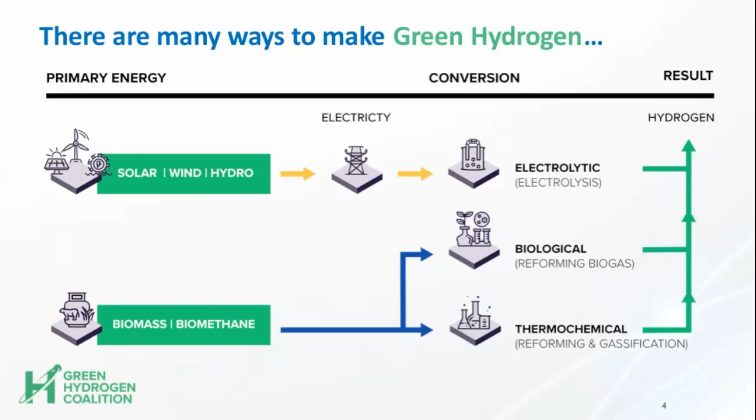Before I go full steam ahead with why green hydrogen is so important, I want to make sure we're all on the same page with regard to what green hydrogen is. For the Green Hydrogen Coalition, we basically define green hydrogen as any hydrogen made from a renewable energy resource. We support all of the above on applications and pathways for making green hydrogen, whether using renewable energy to power electrolyzers that split water into hydrogen and oxygen, electrolytic hydrogen production, biological production through reforming biogas, or thermochemical applications. Essentially, any process that utilizes renewable energy to produce green hydrogen with no carbon emissions is what we consider to be a critical pathway to a decarbonized energy future for everyone.

We really think green hydrogen is a super game changer. To put this in perspective, many of the things we enjoy today—our economy, industry, agricultural sector, power sector—have been fueled by low-cost fossil resources. That is changing, and changing rapidly, because there is demand today for a lower carbon energy future.

That's why green hydrogen can be very important as we look at this low carbon energy and industry future. It is commercially viable. It can repurpose infrastructure and provide for jobs. Hydrogen is already traded today, so it can decarbonize a globally traded commodity. It's utilized in many sectors, so we can decarbonize many sectors. Specific to the power sector, as we see more renewable energy integrated into the system, green hydrogen can provide a solution for reliability and resilience. We really view green hydrogen as a super game changer because of its versatility and because it can be commercially developed and deployed across multiple applications: transport, power, industry, chemical, agriculture—and I think we'll find unlimited applications for green hydrogen going forward.

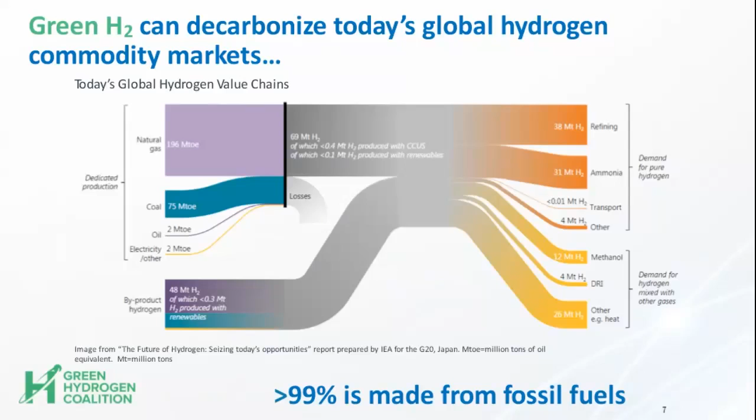To further emphasize this point, hydrogen is used today—it's about a 70 million metric ton traded volume annually, used in many, many sectors. The challenge is that 99% of the hydrogen we use today is made from fossil fuels, either natural gas or coal. A very small percentage is made from renewable energy resources, or green hydrogen as we've defined it previously.

So we think there are drivers for green hydrogen today. As we look at the transportation sector, I'm sure you've heard about initiatives for electric vehicles or zero emission vehicles. Looking at those transportation uses and decarbonized solutions in the transport sector—which can be very difficult to decarbonize, particularly maritime, trains, or large fleets—green hydrogen can certainly be a resource across that sector.

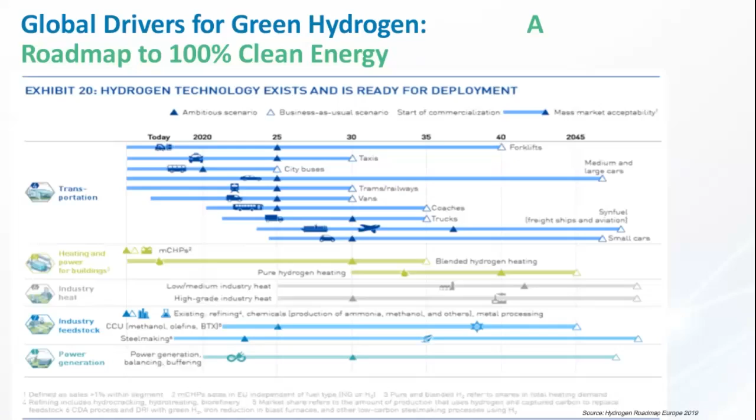We also talked briefly about the industrial sector and chemical applications. What we're seeing today within those applications, occurring globally, is a social license to operate, and pressures to decarbonize across those sectors. So they're looking at green hydrogen as a solution, providing a clean energy and feedstock roadmap for the future. It's not to say there aren't barriers—if you've heard about green hydrogen, you've probably heard some of the considerations around barriers to accelerating green hydrogen production and use.

But just take a look at what's happening across the globe today. Renewable resources, solar and wind, are becoming super cheap, and in fact they are displacing other forms of power generation, in particular gas peakers or combined cycle gas turbines. This trend is continuing as the cost of these renewable resources keeps declining, even faster than people expected. So you've probably heard that cost can be a barrier to deploying green hydrogen, but to the extent these resources are used in producing green hydrogen, the decrease in the cost of these inputs will be significant in reducing the cost of green hydrogen and making it a viable resource.

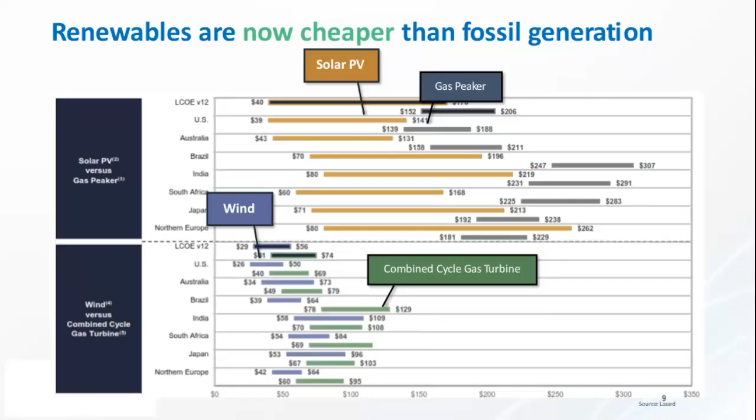In fact, most analytics are predicting that green hydrogen really is commercially viable and is on a trajectory to be the lowest cost. Today, I think probably a conservative estimate has been provided by IRENA, the International Renewable Energy Agency. As a government agency it does tend to be conservative, and it projects that the cost of green hydrogen will be halved by 2050. We think it can happen much faster than that, and there are other predictors out there that indicate that.

Why is that the case? Well, because as we see these demand drivers, we see the cost of renewable energy coming down, and we begin to see the scale up and deployment of green hydrogen, effectively we're going to see cost reductions. So let's jump into some of the demand drivers.

Relevant to the conversation today, renewable energy is an important part of a low carbon energy future. Our economy has relied on fossil energy to provide this reliable baseload energy resource, different from the renewable energies we're seeing coming into the market today. I don't know if everyone is familiar with what's happening in California, but essentially at times of the day there, so much renewable energy is produced, predominantly from solar resources, that they actually have to curtail those resources. Now, curtailing resources isn't necessarily a bad thing, but it's really when you get these uneconomic curtailments and very steep ramp rates.

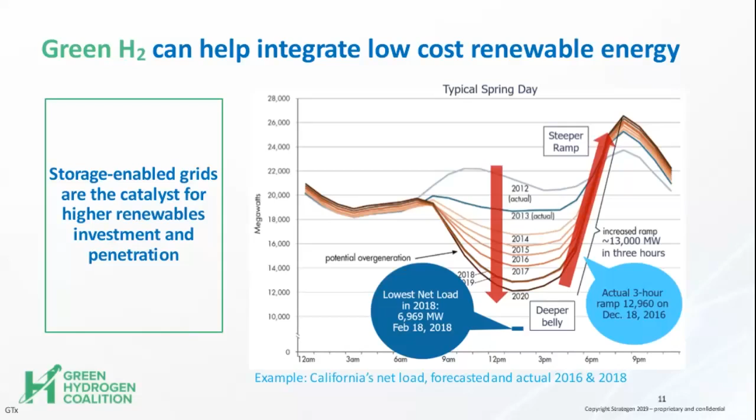The reason for that is a lot of this low-cost renewable energy does get used across the Western grid. So it can be an important resource, but we really have to address the significant ramp rate, and storage is a very important part of that. It's not just short-term battery storage, it's going to be long-duration energy storage that's required to provide for longer duration shifts and seasonal shifts on the grid.

So I want to highlight that to really look at long-duration energy storage and push this into the system, and green hydrogen specifically, we really need leadership, and leadership is going to be fundamental to seeing this happen. A big place where that is going to occur is on the regulatory landscape, because storage and green hydrogen provide just a suite of values, and that value proposition is significant.

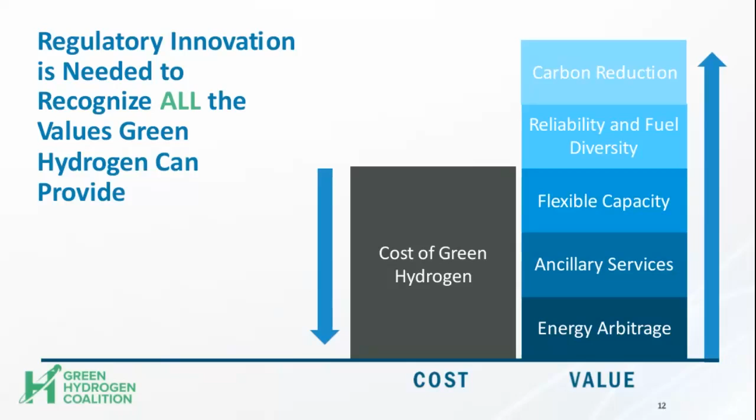So if we can bring down the cost of green hydrogen, extend the utilization of green hydrogen for storage, and account for all of these additional benefits, I think that's going to address some of the hurdles in seeing broader deployment. So with that, I want to turn to what's happening today, because this isn't just creative ideation. This is happening in the real world today.

Across the globe, we're seeing ports in Belgium looking to utilize green hydrogen by 2025. We're seeing production in Canada coming online in the next couple of years to inject green hydrogen into a gas pipeline. So we're seeing this move to utilize existing infrastructure, repurpose it to provide for a low carbon energy future. And that's happening right here in the West, in Utah specifically, with the reimagining of the Intermountain Power Plant, repurposing that existing infrastructure to support the demand for energy and power in California.

So through leadership, which is really critical to driving this future, we have through IPA and LADWP the emergence of a very significant and important project. The Green Hydrogen Coalition is very focused on this project and breaking down policy and regulatory barriers to assure that this project is wildly successful, we'll say. So we're super grateful, of course, for all of the leadership to launch this project.

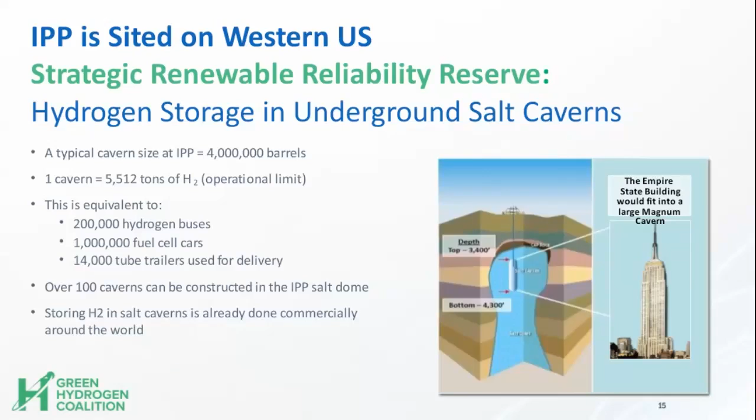In addition, we think that this can drive feedstock availability for many other sectors, including the transportation sector - buses, cars, and other aspects of transportation - and really can be a game changer in realizing a decarbonized energy future for everyone.

So today, green hydrogen is in fact the only commercially viable seasonal storage solution. We support all types of storage, and I personally think all types of storage are going to be needed. Estimates indicate that in the western United States, we're going to be capacity short in the very near future.

Some predictions estimate as early as the next 5 years, we're going to be in a situation where we've really got to add a lot more storage to the system. But just generally speaking, by about 2032, we're going to need close to 50 gigawatts of energy storage on the system.

A small portion of this will be needed from short duration energy storage like batteries, possibly compressed air energy storage, and also pumped hydro. But when we really look at the seasonal energy storage and shifts, we're going to need a significant amount of diversified large-scale energy storage.

So we think that this is absolutely possible. And as you look at the levelized cost of hydrogen storage, storage in salt caverns is going to be the lowest cost.

But I do think it's important to note that hydrogen can be stored in other ways as well, in rock caverns, in ammonia through thermochemical processes, and also in depleted gas fields.

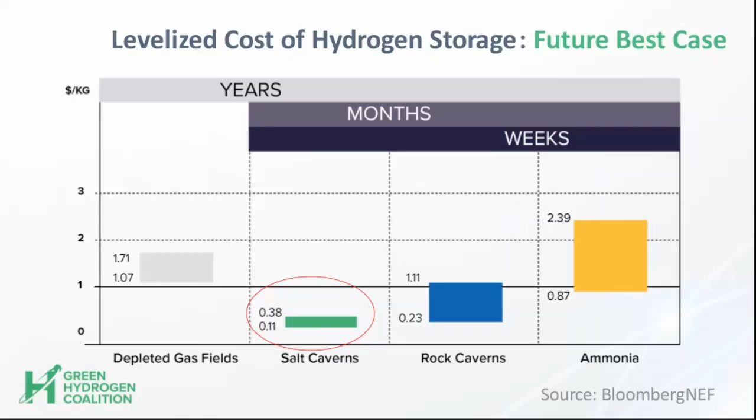So we're on the trajectory for this future. We're very excited about it. Green hydrogen is going to be critical to solving our grid challenges and meeting the energy storage requirements of the future. So that's it.

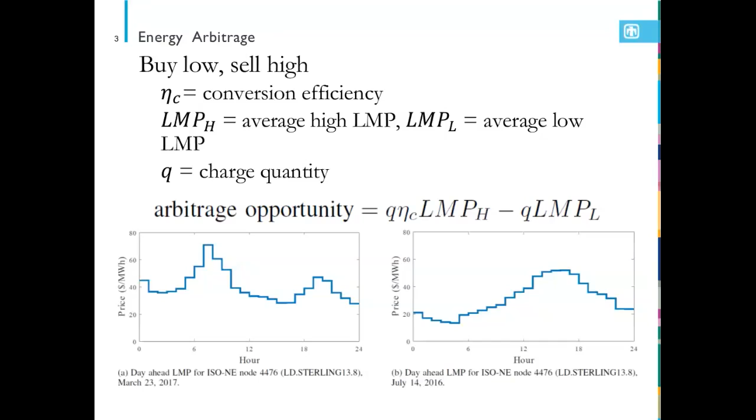Also, because energy storage arbitrage is only maybe done for a couple hours a day - let's say you're just taking advantage of one peak in the late afternoon - a typical system might charge for 5 hours and then discharge for 4 hours. You're really only using it about 9 hours a day, so the utilization isn't very high. That helps explain why the revenue is often not very high.

But as far as efficiency, if you have 85% round trip efficiency, you have to have about 118% price difference just to break even. If you have 65% round trip efficiency, you have to have 153% price difference just to break even. So once your efficiency starts getting lower, you really need big price changes in order to just break even, let alone make money.

In market areas, it's pretty well defined - you have market prices. In vertically integrated utilities, you can still do arbitrage, but really what you're doing is lowering the overall operating cost of your whole system. If you can better dispatch your traditional generation, you can have cost savings on fuel and other things. So it's really a savings in a vertically integrated utility, whereas in a market area, you're buying and selling, trying to make a net profit.

There are also different variants. You can charge with inexpensive renewable energy. You can also participate in maybe the day-ahead and real-time markets, or just participate in the day-ahead only market.

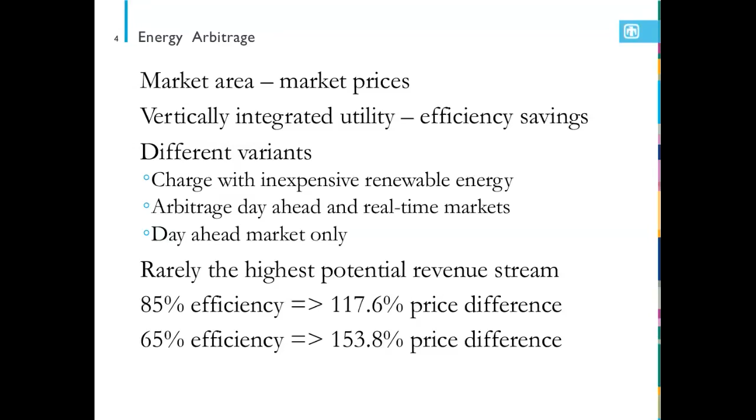So this slide just shows some sample results for California. We used our software tools to model a 1 megawatt, 4-hour system with 80% round trip efficiency and looked at 3-year total revenue by LMP node using 2014, 2015, and 2016 data.

We actually completed a similar study this year going from 2014 to 2018. The color of the dot is proportional to the amount of total revenue over that 3-year period. For this analysis, we assume perfect foresight, meaning you know the future, which is the best you can possibly do. Without perfect foresight, you might get somewhere between 80 to 90% of this revenue for the day-ahead market. The plot on the left is day-ahead market arbitrage.

The first thing you'll notice is the total best node is around $150,000 for the 3-year period. A 1 megawatt, 4-hour system might cost $2 million to $3 million, so you're really not going to come anywhere close to breaking even with $150K in total revenue.

The plot on the right shows day-ahead and real-time arbitrage. The first thing you'll notice here is the potential revenue is significantly higher. That's because of the volatility in the real-time market.

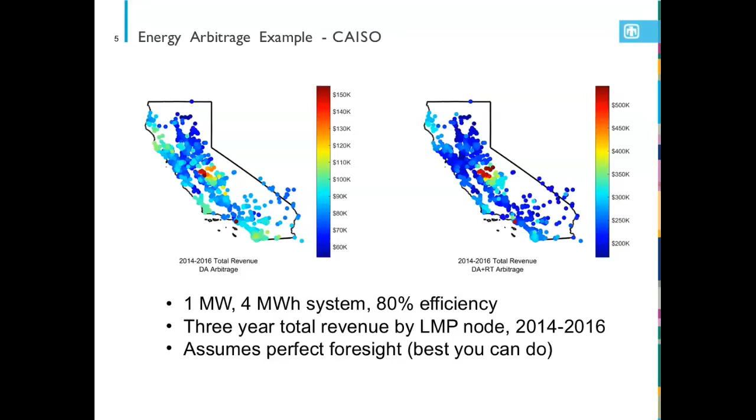Renewable energy time shift is another energy storage application. Dr. Nelson had previously discussed the California duck curve, so this will be the second mention - we'll see if Patrick mentions it in his presentation too. But the general idea here is that the deployment of large amounts of rooftop solar has really depressed demand in the middle of the day.

Then in the afternoon, as the solar rolls off and load increases, you have this quick ramp of required net load that you have to meet with generation. That does cause a reliability concern because in the electric power grid, your load always has to match generation to maintain grid frequency. And if the deviations become too great, that can cause under-frequency or over-frequency events, which ultimately might lead to blackouts.

In CAISO, they've implemented a ramping product. In other areas, arbitrage is your only option. But the idea here is if you could move the renewable energy from the off-peak part of the day when it's generated to later in the afternoon, you'll be able to basically flatten the demand curve and make the operation of the overall power system more efficient and safe.

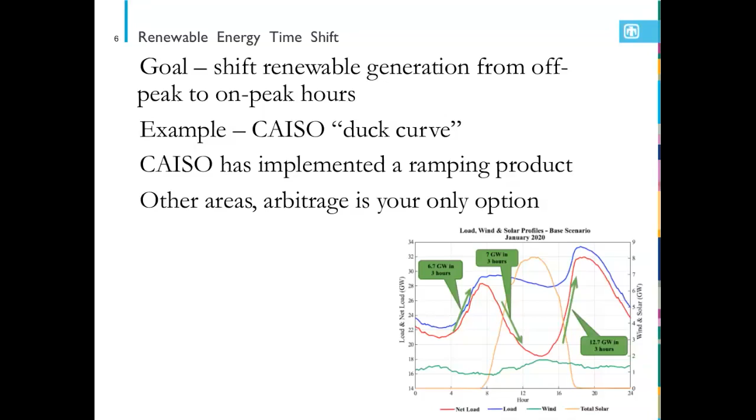One thing people often don't realize is there are trade-offs between the amount of storage, additional transmission - which provides geographic diversity and reduces variability - and renewable curtailment. So when you're looking at expanding a power system or modifying it to incorporate more renewable or carbon-free generation, you have these trade-offs.

Energy storage can easily store energy when it's not needed and then use it later when it is needed, and also help with the variability of renewable generation. Additional transmission helps reduce that variability, so it reduces the amount of storage required.

And as the previous speaker had also mentioned, you can curtail, which means you're basically not using the energy for anything. Although that sounds really bad, it's really an economic decision - what mix of energy storage, additional transmission, and curtailment will give you the lowest cost power system that meets your reliability requirements?

There's a misconception that lithium-ion batteries can be used for long-term storage. Maybe hypothetically they can be, but look at the Raccoon Mountain Pumped Hydro Facility in Tennessee. It's a 1.6 gigawatt system that can store for 22 hours, so it's a massive amount of energy.

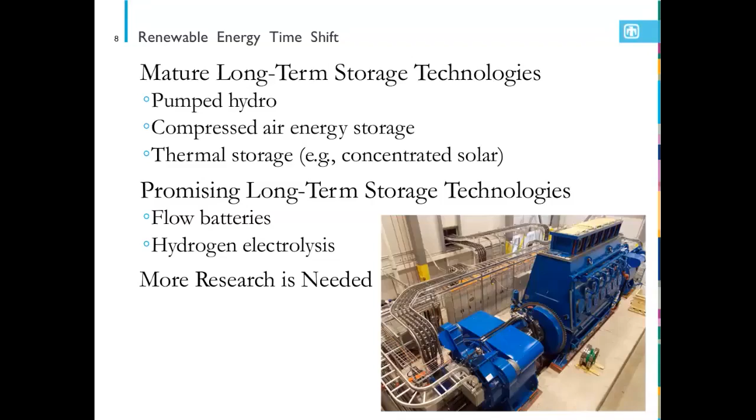Time of use charge reduction is a behind-the-meter application, and this is really just arbitrage based on the rate structure. Some utilities have rates for each time period, basically real-time pricing, or on-peak, off-peak pricing. The idea is you use more energy when prices are low, and less when prices are high. For the same reasons as arbitrage, this is often not a significant benefit.

Then there's demand charge reduction, also a behind-the-meter application. Typically your utility bill is based on your maximum rate of consumption over the billing period, so whatever your peak demand is influences your electricity bill. If you have a load with narrow spikes, that can greatly increase your cost for energy. Narrow spikes are often caused by loads like pumping water, or any big motors that you turn off and on periodically.

So often this applies to light industrial type applications, but it can also be beneficial for more residential consumers as well, and this can be a really big potential benefit. In California and other places with demand charges, people are deploying relatively small energy storage systems that can have a really fast payoff.

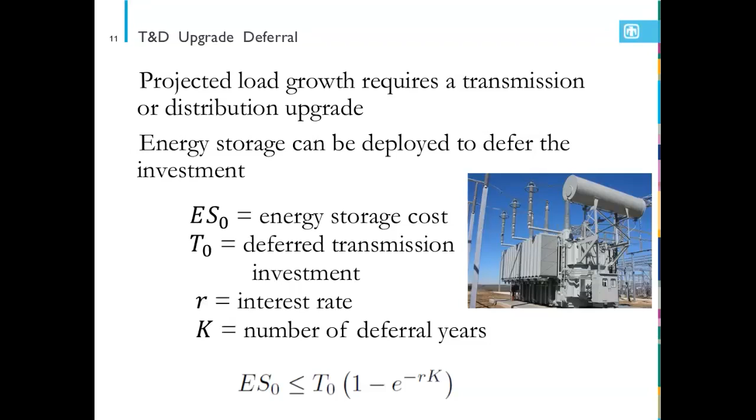Oftentimes people will go look and try to find other things for the storage asset to do during the rest of the year. Depending on the degradation model for the storage system, this might or might not be a good idea. You might end up using up the useful life of the system performing activities that aren't really of high value, and then not be able to perform this particular application when you're required to. So you really do have to look at the overall model of what the system's going to be used for, including degradation.

Grid resiliency is a really popular application for energy storage. Events like Hurricane Sandy and Hurricane Katrina have increased interest in this, and also Maria in Puerto Rico. People usually use value of lost load to estimate what the resilience value of energy storage is, and this comes from two different places, either market prices or surveys.

Lawrence Berkeley National Laboratory does most of the analysis on value of lost load. One challenge with this is the way they look at this data, they tend to break it up for different categories. We recently did a project with Sterling Municipal Light Department in Massachusetts, where they wanted to procure a system.

Primarily to keep power on to their first responders, police and fire department. They ended up purchasing the system, but the resilience benefit using this type of information really didn't capture the true cost or true benefit, because the closest category was data for public administration, and that likely underestimated the value to Sterling because it didn't take into account providing power to first responders, where you might save a life.

Related to grid resiliency are microgrids, which are a combination of renewable energy, storage, and alternate types of power combined together. Energy storage is a key component. The operation of a microgrid, as well as the design of a microgrid, are both optimization problems.

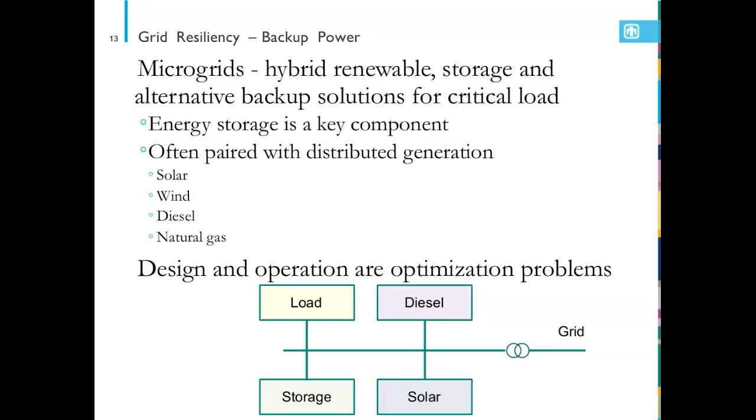Frequency regulation is the second-by-second adjustment in output power to maintain grid frequency. You follow an automatic generation control signal generated by the balancing authority that commands you to modulate your output power to maintain grid frequency.

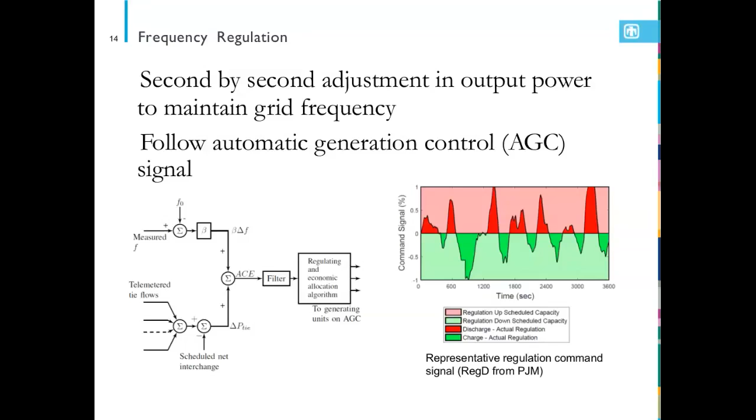Implementation varies by different independent system operators. There's a bidirectional signal in PJM, but in other areas like CAISO and ERCOT, they break it up into regulation up and regulation down. Depending on the capabilities of your system, you can just participate in one direction. The figure on the right is a 20 megawatt, 5 megawatt-hour Beacon flywheel plant located in Pennsylvania.

Pay for performance is a recent change over the last five years, where now there's a performance score—how well did you track your command signal. That's been very beneficial for energy storage because energy storage is very fast and good at tracking the signal.

There's also a mileage payment, which is a function of the distance traveled. So if energy storage can better follow a fast signal that moves around a lot, it has more mileage and results in a higher payment. And then there's also a capacity payment that's provided just for signing up to provide the service.

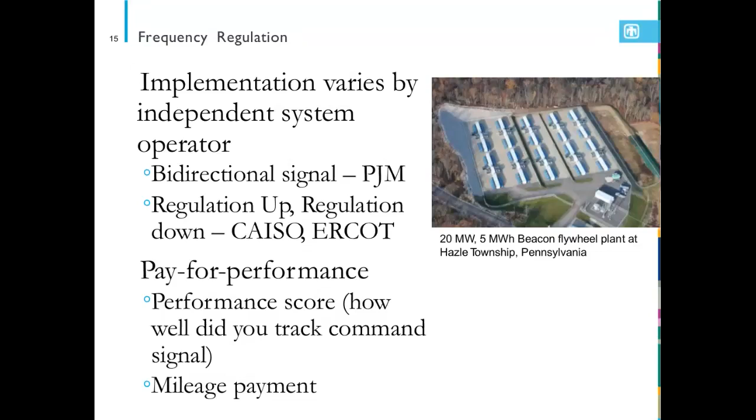These are some results from a study we did a couple of years back looking at PJM. We modeled the Beacon flywheel power plant, which is a 20 megawatt, 15-minute system made up of 200 flywheels. We looked at one year of market data and calculated the potential revenue from participating in frequency regulation and arbitrage.

The optimal policy was basically to do frequency regulation all the time—98, 99, 97% of the time you're doing frequency regulation. The other small portion of the time, you're participating in arbitrage just to balance your state of charge.

But if you look at this one year period, the total revenue was about $6 million. It cost about $20 million to build one of these flywheel plants, and this particular one went through a reorganization, so it was actually purchased for pennies on the dollar. So the new owners of the plant have probably done okay.

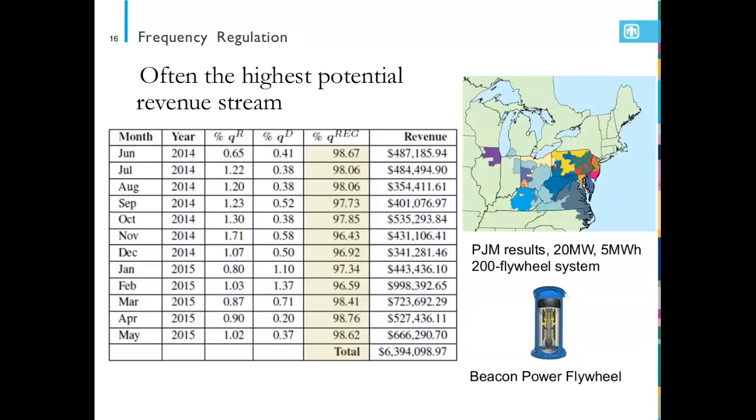One challenge here, though, is PJM's frequency regulation market. Because it has been profitable for energy storage, there have been a lot of new entrants. If you look at the year-over-year potential revenue, it's been declining significantly over the last five years. That's a challenge—the frequency regulation market is relatively small, only maybe 1 to 3% of the total size of an energy market. So if it starts out really good for energy storage, eventually there's potential for additional market entrants, and then the revenue won't be as good for everyone going forward.

Then there's voltage support—typically you inject real or reactive power to control voltage. One thing that's beneficial for energy storage is that you can support reactive power over a wide state of charge range.

It's really limited by the inverter rating, so it doesn't take much energy to do this. As far as compensation, some ISOs compensate for reactive power at the transmission level, mostly based on the opportunity cost of not providing real power, since if you provide reactive power, it limits the amount of real power you can provide.

One challenge here for energy storage is that there's a lot of competition. Pretty much any inverter-based resource can provide reactive power for voltage support. Rooftop solar has inverters, and any other type of technology that uses inverters can do this. Another challenge is that right now voltage is controlled usually by adding capacitor banks, which are relatively inexpensive, so the value of this is still probably relatively low.

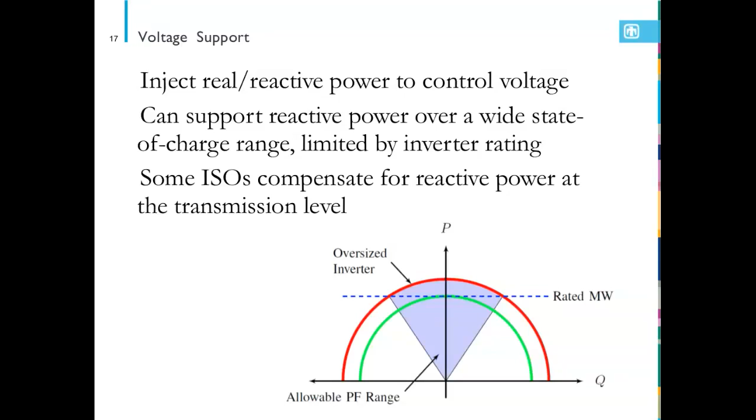And it's also location specific. Most of the voltage control problems are in the distribution network, and right now there really is no compensation mechanism for providing voltage support in distribution networks.

You can inject real power at different points in the grid to provide damping for these oscillations. Sandia and Bonneville Power Administration had a demonstration project where we looked at modulating the Pacific DC intertie to mitigate these oscillations. It was very successful.

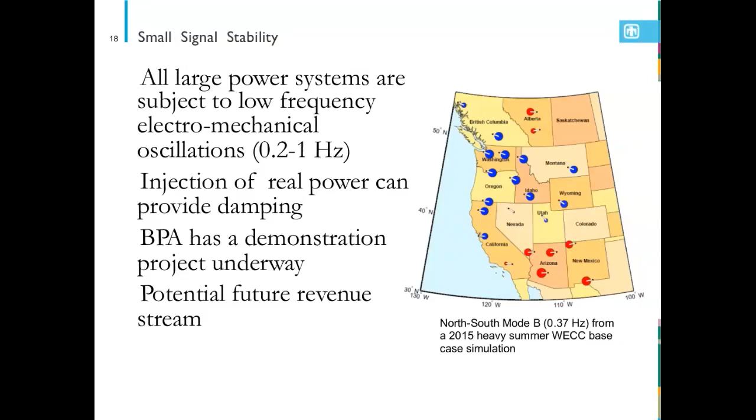Energy storage is unique in that, because it'll be distributed throughout the grid, for this particular application you need to be in the right place to provide the right benefit. So there's a location-specific aspect of this. It's also nice for energy storage because the control signal you output is relatively short duration, and it's high power but low energy. So this is a potential future revenue stream, but it's probably a long ways out. Folks are just starting to consider this.

Frequency droop is basically generator speed control, and for a traditional generator there's a control loop proportional to the frequency error. This is important because when a system loses a large generator or a transmission line goes out, system frequency drops, and the rate of change of frequency is proportional to the inertia of the system. Then the frequency nadir, the lowest frequency reached after this event, is proportional to the amount of frequency droop in the system.

If you don't have a lot of frequency droop, the nadir is lower, and that will cause a lot of under-frequency load shedding and potentially lead to worse things like a blackout. Energy storage can provide frequency droop easily just with a control law. One challenge is how do you measure local frequency?

Local frequency is based on looking at the 60 hertz waveform, which is normally a pretty clean signal, but when you have a fault nearby, that signal can become distorted. So one of the research areas we're looking at is how to estimate grid frequency in the presence of faults and other disturbances.

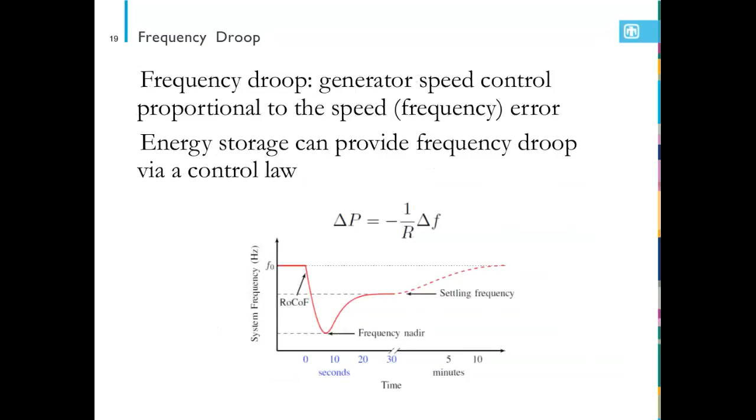U.S. generators are not required to provide a frequency responsive service, nor are they compensated for providing it. The Eastern interconnection suffers from a lazy L behavior, where when grid frequency starts dropping, you basically get to your nadir, then bounce around at the nadir and keep going. It's an L-shaped response, that's why they call it a lazy L.

FERC has been looking at this. In 2016 they started looking at it, and by 2018 they'd issued FERC Order 842, which requires that all new generation must be capable of providing primary frequency response as a condition of interconnection. They basically modified the small and large generator interconnection agreements. It still remains to be seen how you're compensated - this just says you have to be capable of providing it. So energy storage can definitely do this and provide value to the grid, but there are still questions about how to be compensated.

Related to this is synthetic inertia. Right now, large rotating machines provide the inertia for the grid. Inertia is important because it governs the rate of change of frequency after a generator drop. As you lose inertia, system frequency will drop much faster, whereas more inertia in the system means that rate of change is slower. So inertia is good, it slows things down, which tends to make your frequency nadir higher, and by slowing things down it also gives time for the system to react.

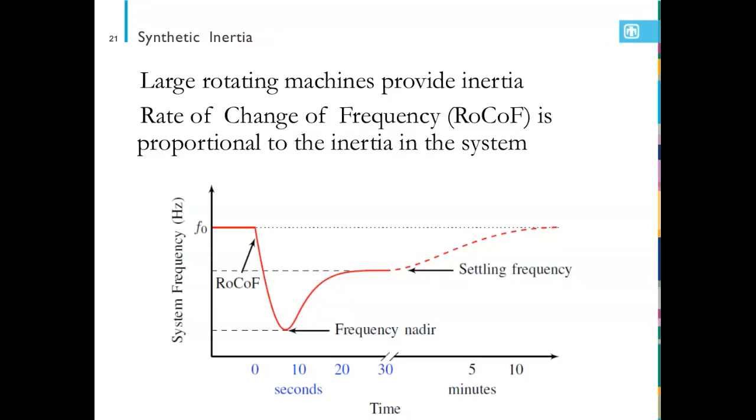A concern with respect to inertia is that as we start putting in more inverter-based generation onto the grid, like wind and solar, it starts to displace the inertia provided by conventional generation. So you're starting to see reductions in inertia in many large power systems. Energy storage can provide synthetic inertia via control law.

It's relatively straightforward. You just take the derivative of the change in grid frequency. Right now, there are no mechanisms for compensating resources that provide inertia.

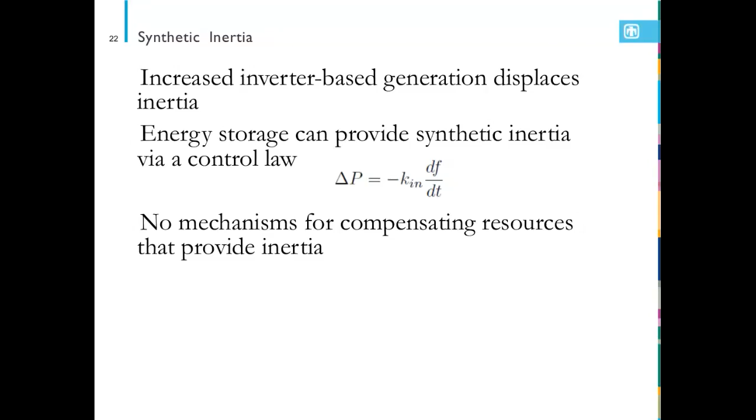And similarly to frequency droop, if you're using a local frequency measurement, you have the challenge of how you estimate grid frequency in the face of a disturbance where the grid waveform might not necessarily be sinusoidal. So how do you even define or measure frequency?

If instead of relying on local frequency you look at some kind of average frequency, you can improve the performance of the overall system because you're not following inter-area oscillations.

This is just a simulation result of the Western power system with a double Palo Verde drop. You can see these are different generator speeds, which represent frequency at different points in the grid, and they tend to follow a general path, but they oscillate about that path.

If you take the average of these, then you're not responding to these oscillations that are basically the inter-area oscillations. So implementing synthetic inertia with some kind of average system frequency has advantages, but also disadvantages. To do this, you require communications, which adds latency, and also makes you prone to communication issues.

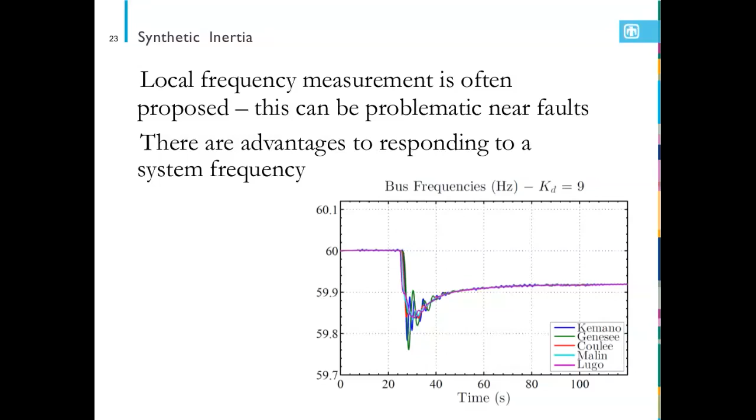Some areas are placing ramp rate limitations on renewable generation, primarily Puerto Rico and Hawaii. So meeting these ramp rate limitations is going to result in penalty avoidance. This is a cost savings measure in most places.

The idea behind the control law is you have your renewable generation plant that has some output that's variable. You run it through a filter that calculates some power reference signal that meets whatever the specifications are for the ramp rate limitations. Then you look at the difference between that and your current output, and that's the output that energy storage can provide.

So it's relatively straightforward to implement, and it's being required as more locations are putting limitations on ramp rates of renewable generation.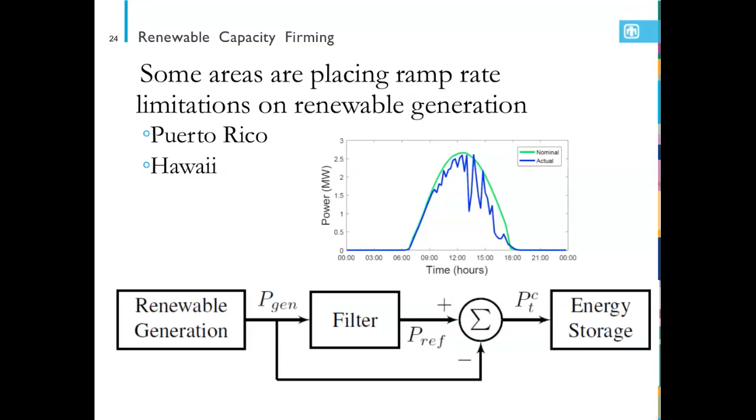We talked a lot about different types of revenue streams from energy storage. The next step is how do you maximize the revenue from all these potential revenue streams. You can formulate this problem as a linear programming optimization.

The first step that we usually do is we look at the best possible scenario, which is perfect foresight. That gives you insight into the operation of the storage system, like when it would charge and discharge in the optimal scenario, and gives you a starting point for developing an operating strategy that does not rely on perfect foresight.

The benefit of this approach is that it also gives you the best possible scenario. If it doesn't make sense with the best possible scenario, it's not going to make sense with scenarios where you actually take into account lack of perfect foresight, and the potential revenue is going to be less.

In most market areas, frequency regulation is the optimum application. A notable exception is ISO New England. They have a forward capacity market payment, which is based on your coincident peak load hour over the whole year.

And then they have a regional network services payment, which pays for your pool transmission in and out of ISO New England, and that's based on a coincident peak load hour each month. These are both basically demand charges, so you can use energy storage to significantly reduce your payments into both of these.

Grid resilience is a common goal, but value of lost load from surveys often doesn't yield significant value, and it doesn't capture the value of first responders.

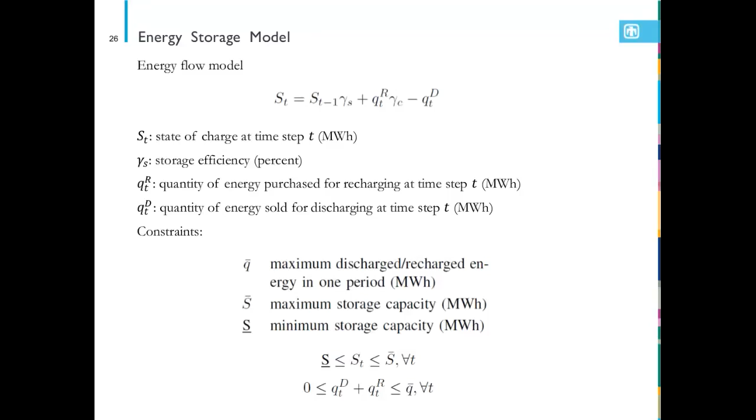In addition to the storage model, we define an objective function. This is an example for CAISO looking at the day-ahead and real-time market. Basically you have a term for each decision variable - for instance, the quantity you purchase or sell into the day-ahead market times the price associated with that activity. We also have some cost terms you can employ, but oftentimes we ignore the cost terms.

Degradation modeling is an active area of research. One way to look at a storage system is you have a total throughput over the life of the system, and then it's really easy to come up with a cost associated with charging and discharging, which you can use as the cost terms in this equation. One pitfall with that approach is that the real system is a little more complicated.

Your charge-discharge cost, or throughput of your system, is going to vary depending on how you use it. If you use a large number of shallow depth of discharges, you might get significantly more throughput relative to another application with very deep depths of discharge that wear out the system more quickly. So properly modeling degradation is still an ongoing challenge in this area of research.

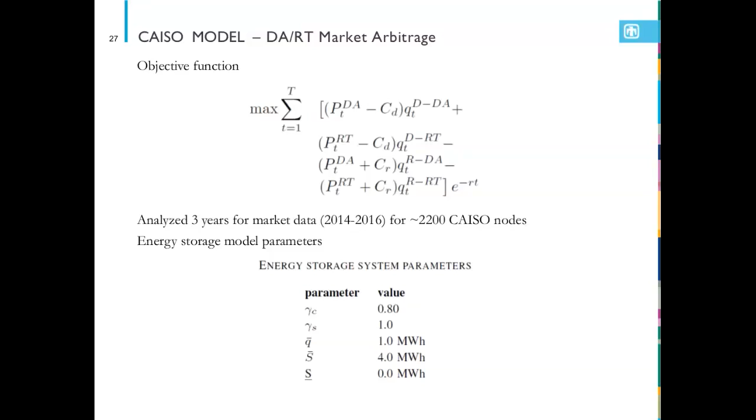If you throw frequency regulation into the mix, you'll notice a couple things. First, the revenue is better than just day-ahead arbitrage, almost by a factor of 2. The other thing is that locational variability decreases significantly. Part of the reason is that for this scenario, doing frequency regulation is the optimum revenue stream for energy storage, and in CAISO, frequency regulation is zonal. So all the particular nodes down here in the south have relatively high revenue with not a lot of variation between nodes, because the regulation prices are zonal and regulation is the optimal activity.

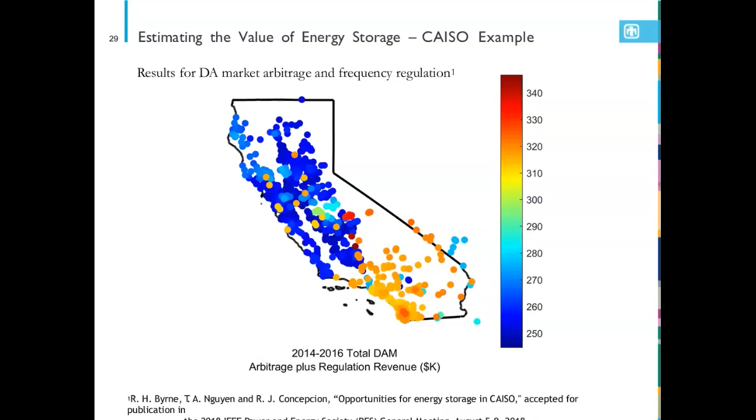That's an advantage from an energy storage perspective, since there's less location-specific nature associated with the revenue. Up in the north, you see a little more variability, but it's still much better than the previous slide, where there was a lot more variability from the location-specific nature of the value of storage.

So this slide talks a little bit more about the Sterling application. Sterling is a small municipal light department in Massachusetts, and they were interested in providing power to the first responders, basically their police and fire departments. The load for the fire department was really low, maybe 10 kilowatts, so it wasn't a large load.

We considered several different value streams: energy arbitrage, reduction in monthly network load based on a monthly peak hour, reduction in capacity payments for the forward capacity market based on annual peak hour, grid resilience, and frequency regulation. The chart shows the different revenue for a 1 megawatt 1 hour system using 2017-2018 data. You can see the forward capacity market obligation is about 45% of the total revenue for that year, and it's only a 1 hour discharge.

So if you miss that 1 hour, you would lose 45% of your potential revenue. Because of that, we had some discussions with Sterling and started looking at what times of day these peak hours typically occurred. We ended up recommending increasing the capacity of the system so they could discharge during 2 hours just to make sure that they hit this peak hour.

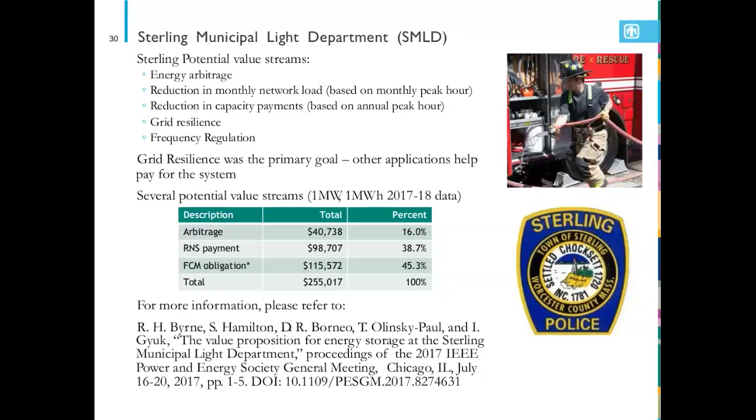One comment here: resilience was the primary goal, and it turns out that other applications really help pay for the system, and that's fairly common across other types of demonstration projects that we've worked on. The goal might be resilience, but oftentimes there are other methods that actually pay for the system.

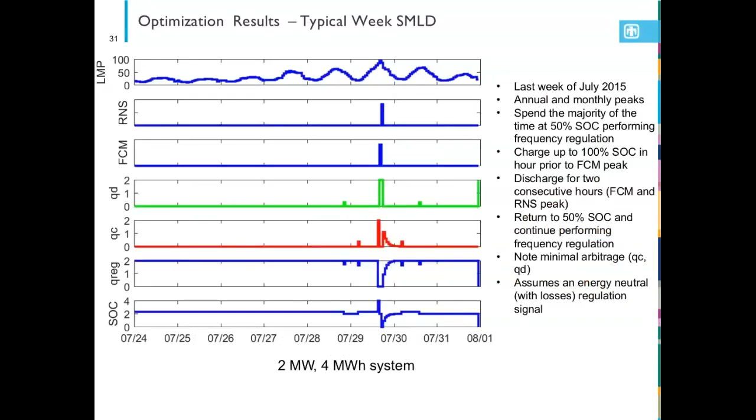So these are just results from an optimization showing the operation of the system, and we'll go to the next slide that zooms in on the day of interest.

For this particular case, frequency regulation was the optimal policy. The state of charge, which is the bottom chart, hangs out about 50% state of charge during frequency regulation, and Q-reg is the amount bid in the frequency regulation market. So you're doing that all the time.

Then you have to basically charge up because in this particular month, the monthly peak for the regional network services is right next to the forward capacity market peak. So you have to discharge for these 2 peak hours to capture that benefit, and then you go back to 50% state of charge, doing basically frequency regulation all the time.

This highlights one of the challenges with energy storage and value stacking. You have to charge and discharge at the appropriate times to capture each of the different benefits. If you charge and discharge at the wrong time, you'll basically either miss the benefit totally or even incur additional expenses, which make the numbers even worse. So a lot of it comes down to a forecasting problem, and as you try and stack more and more benefits, it becomes more complicated as well.

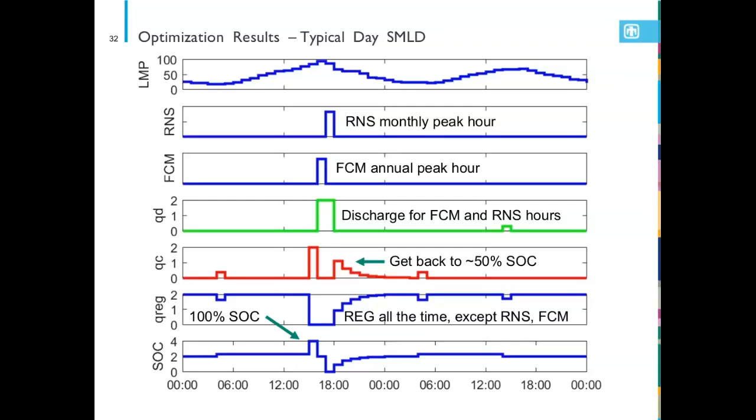So even though people think value stacking is the key to making energy storage more cost effective, there are challenges associated with it. A lot of finance folks that we speak with, if you have a scenario where you're trying to stack more than 2 or 3 benefits, they get a little worried just because it's a little too complicated, and they worry about you being able to execute and actually achieve that potential revenue.

So this slide talks about valuing storage in a vertically integrated utility. The key takeaway here is that it's fairly complicated. Production cost modeling is the gold standard for valuing storage in the integrated resource planning process. Really what you're doing is coming up with a very accurate system model that includes your transmission system, load variability, renewable variability, generator models, and then looking at what the optimal dispatch of your system is to result in the lowest cost energy to the consumer.

And so this helps you primarily address how you do arbitrage reserve products. If you're looking at other energy storage benefits that require more technical analysis, this can include things like primary frequency response or looking at deficient inertia. You have to do dynamic simulations, which are a different software tool. If you're looking at voltage support, you do power flow simulations, which can be the same tool as for dynamic simulations. Usually PSLF, PSSE, Powerworld are common tools.

Solar hosting capacity analysis in distribution networks requires looking at the distribution networks, usually using different modeling tools like CYME or OpenDSS. You also need accurate solar models or irradiance data for your system.

Transmission and distribution deferral requires load modeling. So this covers most of the applications we've discussed in this presentation, but one thing you'll note is that every single one of these requires a different tool and skill set to analyze. So it's difficult and challenging for vertically integrated utilities to look at a wide range of energy storage scenarios, just because it requires different skill sets, different sets of data, different modeling tools.

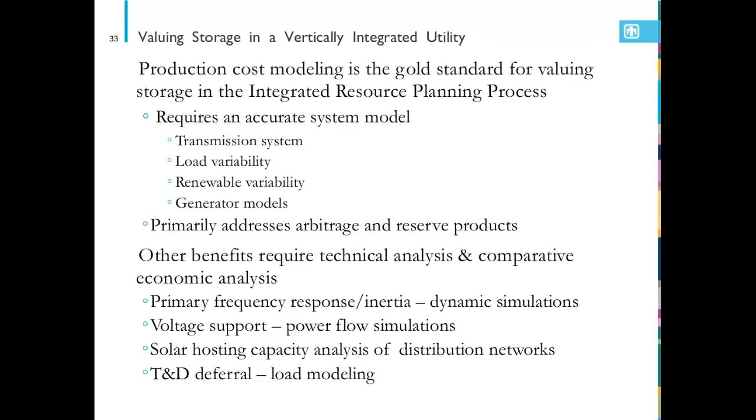As far as stacking benefits, you can stack benefits to increase potential revenue, but at the expense of potentially accelerated degradation of the energy storage system, and also potentially increased complexity of the forecasting control algorithms. Modeling degradation is still an active research area because the charge-discharge profile will impact the degradation of the system.

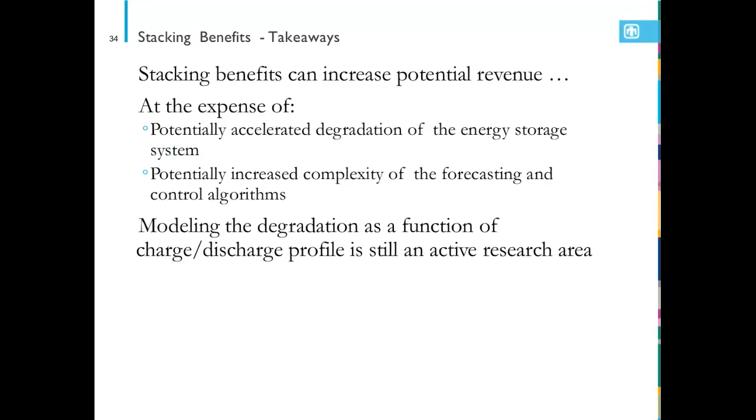In summary, energy storage is capable of providing a wide array of grid services. The regulatory structure is still evolving for many applications. Different technologies are available for energy versus power applications, and valuation of storage is highly location specific.

For further reading, I'd encourage you to go to the Sandia website, which hosts the DOE Energy Storage Program's information on energy storage. There's a wide array of resources, from papers to previous peer review results and other information. So it's kind of a one-stop source for energy storage information.

So with that, thank you, and I'll open it up to questions, or should we wait till the end for those?

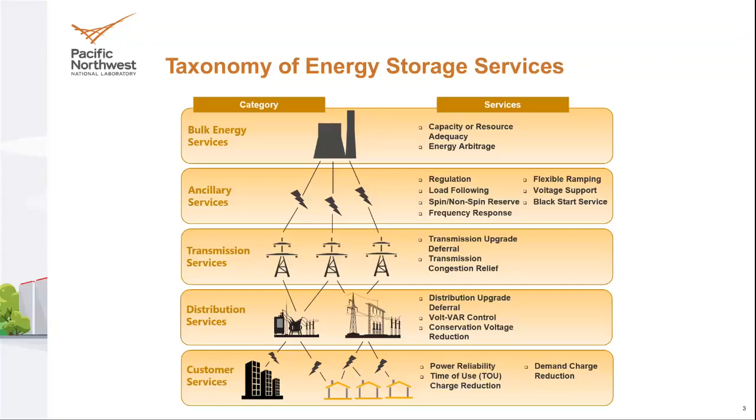We have 5 different categories of benefits: bulk energy services, including capacity or resource adequacy and energy arbitrage, which is buying low and selling high in the energy markets; ancillary services, including those traded in ISO and RTO markets across the United States; transmission services, including transmission upgrade deferral and transmission congestion relief; distribution services, including distribution upgrade deferral, volt VAR control and conservation voltage reduction; and customer energy management services—those that generate value behind the meter for customers.

Arbitrage, the most logical value stream for energy storage, is actually one of the lowest value use cases in the U.S. Regulation tends to be much higher and generates significant value for energy storage systems operating in markets. The rest of the ancillary services, for the most part, are much lower.

Transmission congestion relief, transmission upgrade deferral, and distribution upgrade deferral—the note I'd make is that in the vast majority of cases, there is no value. If you place an energy storage system in a distribution network, there may be no value or next to no value in terms of conservation voltage reduction, which improves efficiencies, or the provision of reactive and real power to handle voltage in the distribution system. Often it generates very little value, but in a small number of locations the value is quite enormous, which is why you see this huge variability with respect to the outcome for distribution and transmission level benefits.

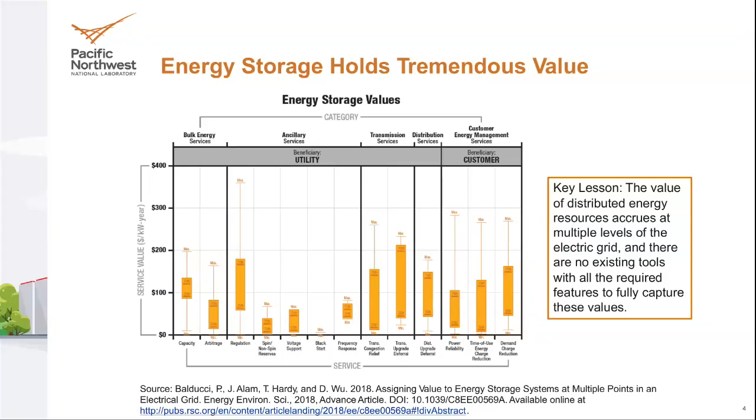I won't spend too much time on these various use cases because Ray already did a great job, but I will identify how we monetize them. I mentioned $80 to $140 per kilowatt per year for capacity or resource adequacy in most locations.

Capacity markets have been established in regions throughout the United States, and it's highly variable from one location to the next if you're operating in these markets. These are forward capacity markets, often clearing 3 and 4 years in advance. In a place like ISO New England, they were clearing at $11 per kilowatt per month just a few short years ago. So it's a very large value stream.

But in the most recent forward capacity auction, it cleared at $2 per kilowatt per month—you've eliminated more than 80% of the value. So if you make an investment based on a prediction of future prices and an assumption that it would continue to be high, that will be problematic. There's a significant haircut taken due to your inability to predict future market clearing prices, and that's been evident in a number of markets across the country.

I'll mention PJM for frequency regulation in just a moment, but effectively you're contributing to that. For all of us who have taken introductory economic classes, if there are significant profits to be made, then there are more market entrants. Effectively, they shift the supply curve outward, and you reduce the marginal point of equilibrium in terms of where supply and demand equal each other, the market clearing price.

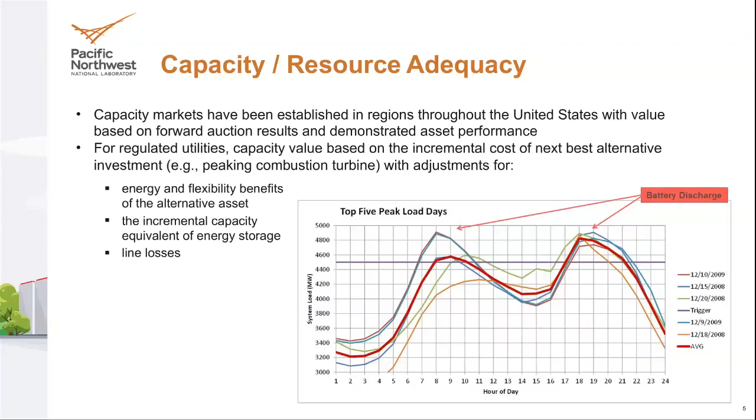So frequency regulation, I think this was covered well by Ray. Effectively, there's a capacity payment, so you bid into the market. Energy storage systems get a full range of benefits.

So when we bid this electrolyzer into the ISO New England market in the hydrogen tool that I just mentioned, it could operate anywhere from 2 megawatts to 10 megawatts, which meant you had to pick a base point of operation, which would be 6 megawatts. So you only have 4 megawatts up-down capacity that is actually bid into the market, whereas a 10 megawatt energy storage system could bid in all 10 megawatts, because you have a full range of 10 megawatts up and 10 megawatts down. In addition to that, you receive a very high performance score, 95% or better, typically.

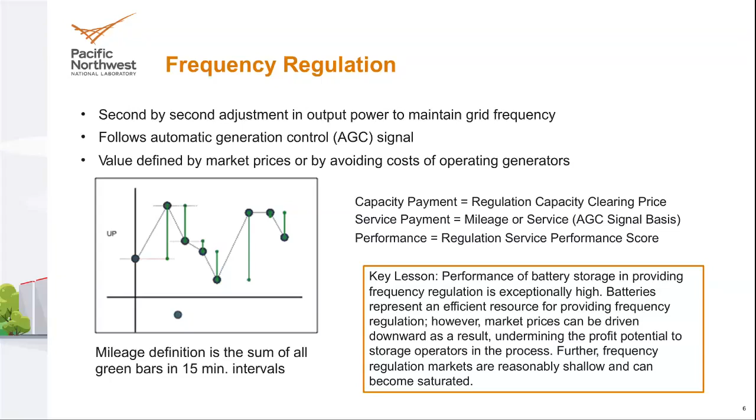And you can see in this graph here that each of those green bars, if you add those all together, that's the mileage payment. So there's a payment for the energy that flows into and out of the energy storage system. Once again, the performance of the battery systems really is so exceptional, and the market's so shallow, that if enough battery storage systems enter the market, they can actually solve the frequency regulation issue quite cost effectively, thus undermining their profit potential. And that happened in the PJM market, where the market prices effectively crashed. And so once again, there's a fair degree of uncertainty about future prices.

Outage mitigation is typically measured in terms of value of lost load, but it can also be measured from the perspective of the utility in terms of penalty payments, so reducing those penalties, and also reducing the lost sales of the energy that's not supplied during an outage.

But what we do is we collect multiple years of outage data, and we create a statistically average outage year. And then we build those outages randomly into our optimization tool. And so basically, whatever state of charge the energy storage system happens to be in at the time of the outage, it triggers a response. And then our tool, using the interruption cost studies from Lawrence Berkeley National Laboratory, measures the with and without storage case to determine the marginal value of having that storage system there and serving that load that would otherwise be lost.

This can actually be a fairly significant value stream for an individual energy storage system, particularly if there are commercial and industrial customers on the feeder that can be islanded. Residential customers, as you can see, the costs are $2 to $12 for a typical outage, up to 12 hours. So it's very low value. But when you start evaluating small and particularly large commercial and industrial customers, these outages can get into the tens of thousands of dollars, even higher in some cases, and I'll touch on that a bit later.

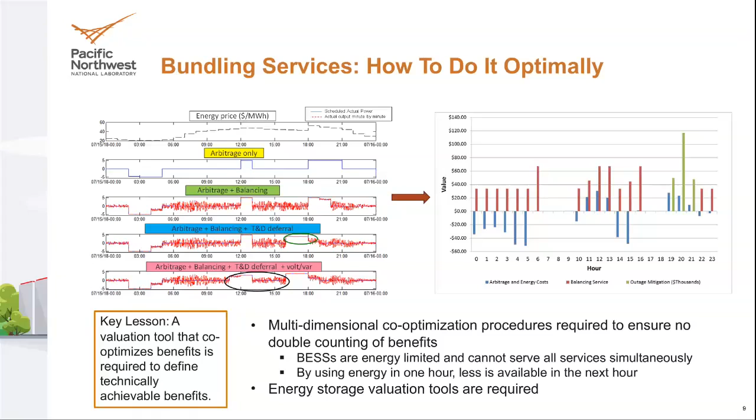Now, throughout the remainder of this presentation, I will discuss several pitfalls and challenges in accurately estimating the value of energy storage. The first case study is Portland General Electric's Salem Smart Power Center.

This was a system built several years ago using ARRA money, so it was extraordinarily expensive at the time, and costs have come down quite considerably since. It was a tremendous R&D project, but from a profit or value perspective, return on investment was fairly poor, as I'll show you in just a moment.

So when you co-optimize, you can see that you're actually eliminating about 28% of the benefits. In present value terms, the benefits fall from $7.5 million to $5.8 million. So if you're not properly co-optimizing, then you're vastly overstating the value.

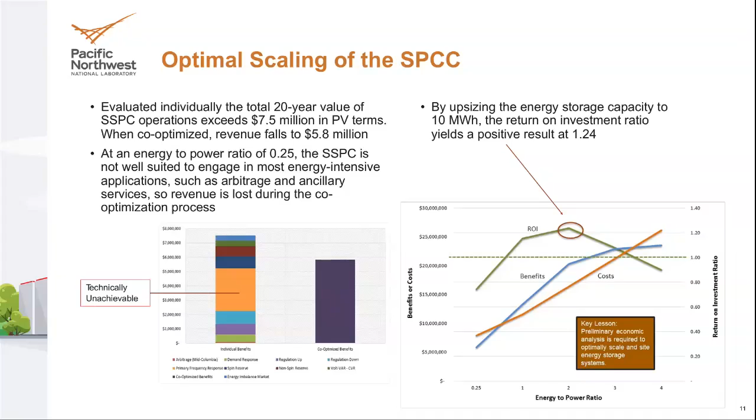Beyond that energy to power ratio, you're actually undermining profit potential, and below it, at 0.25, you're doing poorly. In case you're wondering about the actual investment, the cost of the system was in excess of $20 million, based on the prices that were evident about 10 years ago. So the return on investment ratio for this specific investment was quite low.

So the Nantucket Island Energy Storage System is an evaluation that we recently completed for National Grid in Massachusetts. On Nantucket Island, there's a small resident population of about 11,000, but during a couple summer months, it's a tourist destination and the population swells to over 50,000. There's really only 200 to 300 hours out of the year where there is a capacity problem on Nantucket Island.

So the question is, do they build a third cable? You can see the graph there to the lower right, that would have to wrap around the island and connect at the Bunker Road substation at a cost of $150 to $200 million, or do you build a combustion turbine generator and a 6 megawatt, 48 megawatt hour energy storage system to handle local reliability issues and to defer an investment in that transmission line connecting Nantucket Island, which is 30 miles off the mainland, to the mainland.

So the decision was made to invest in on-site generation and storage capacity at a much lower cost. The cost of the generator was about $33 million, the cost of the battery system about $31 million, and when the full rate impacts were built into the pro forma, including all returns to investors, insurance, borrowing, and the like, the costs are about $93 million.

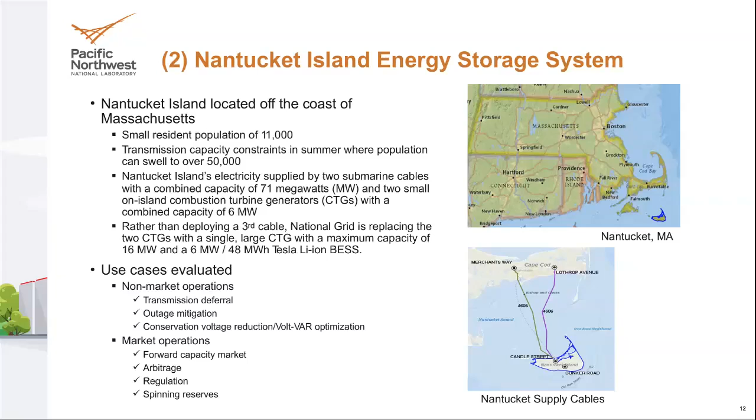So they understood the cost of deferring, the value of deferring the investment in the transmission line, but National Grid didn't understand the full value of the system, so we were hired to help them with that process, estimating that value and defining the operations of the system to take advantage of the landscape of economic opportunities.

So the benefits of local operation: there are actually about 700 outages experienced on Nantucket Island over an 11-year period, so significant reliability problems. We actually modeled the distribution grid there on Nantucket Island. We took their CYME data and worked with it in OpenDSS and GridLab-D, so we could model all of those outages. We started off with the 700, but of course we weren't going to mitigate all 700, so we broke it down to just those we thought were potentially resolvable through the use of on-site generation and the battery storage system.

Through that process, we were able to whittle it down to fewer than 100 outages. For those outages, we were able to simulate the outage and the use of the energy storage system and the CTG for addressing them. If investments were made in reconductoring of 4 lines to enable the full export of the battery system's power and the CTG simultaneously, and automated feeder switching was employed in 4 locations on the island, we estimated that 46% of the customer minutes of interruption could be avoided, because although it was less than 100, the on-site generation could mitigate some of the most significant outages experienced over that 11-year period.

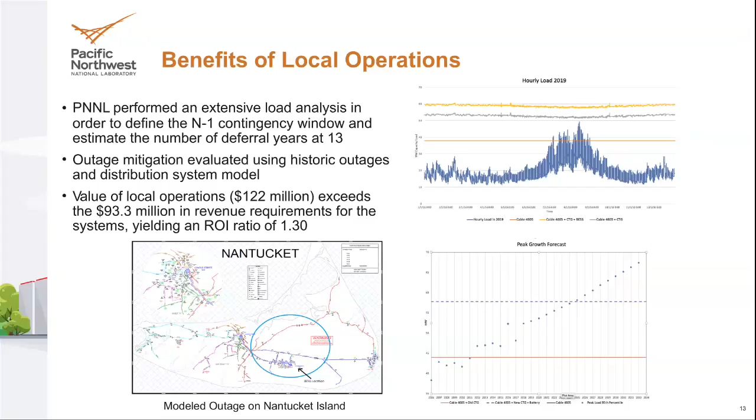So just the benefits of local operations generate a return on investment ratio of about 1.3, so it's quite significant value. But we also took advantage of a recent innovation in the ISO New England energy market by bidding in the energy storage system in hours where it was feasible to do so, and we developed procedures for doing that and ensured we were in compliance with all requirements of ISO New England. With the continuous storage facility, effectively it answers the question: is the energy storage system a generator, is it a demand-side resource, or is it a regulation resource?

And the answer in ISO New England now is yes to all three. That's correct. In some regions throughout the United States, it's still challenging to take advantage of the full range of capabilities of energy storage systems, although that's being addressed through some recent FERC orders and the implementation of those orders.

Now, we didn't assume perfect foresight here. We assumed imperfect foresight, so we used a statistical technique called the gradient boosting machine method with an ARIMA-fed underlying component. Effectively, we were predicting prices based on historic trends and weather forecasts, but then we were clearing on actual historic prices. That showed that, depending on the statistical metric used, there was quite a significant divergence between perfect foresight and something more realistic.

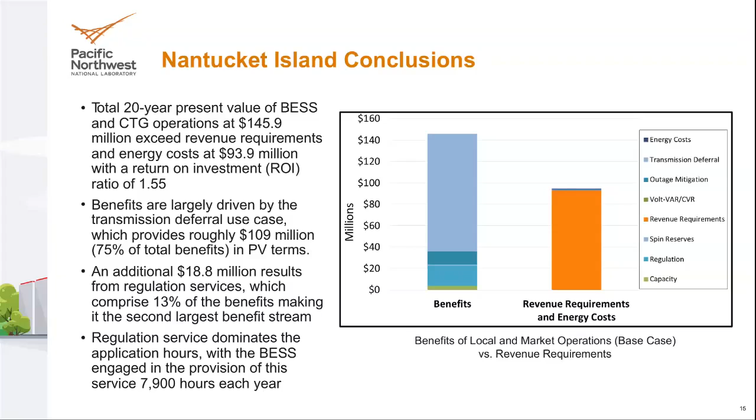And so National Grid is in the process of developing, or plans to develop, such a proposal. Also, we have built into our annual operating plan to keep up with National Grid and show how the values are actually achieved in real time in future years. So in addition to the actual design study we've conducted and our estimates, we're going to actually monitor the performance to show how well they did over time.

Opalco Decatur Island: the major benefit was using the energy storage system to reduce voltage and stress on a submarine cable, and we prepared an electrothermal model to estimate the extension in the life of that cable system based on the use of the energy storage system to reduce the stress on that cable.

Energy Northwest and Northampton Microgrid: those were bill reduction benefits associated with either demand charges or capacity and regional network service fees. And then Avista Turner, that was a unique system deployed in the parking lot of Schweitzer Engineering Laboratories, really designed to address reliability problems there.

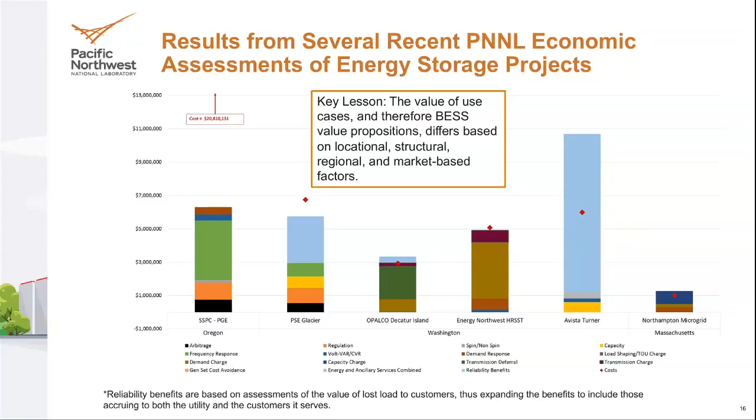I'll add that the system deployed there was a new technology - a vanadium flow technology developed in Washington State, and it did fail. After 2 years, it was disassembled, and they're in the process of replacing it. So that happens as well. Some of the newer, nascent technologies experience technology challenges, particularly with newer vendors, and we've actually experienced that with a couple of our own vendors.

The battery testing program at Pacific Northwest National Laboratory - we've modeled battery systems and their performance and woven it back into our economic tools and algorithms. We begin using the DOE-OE test protocol and perform baseline testing, then we go through use case-based testing. We try to model what a battery system would be doing if it was operating at this location, for this utility, getting into this specific regional energy market.

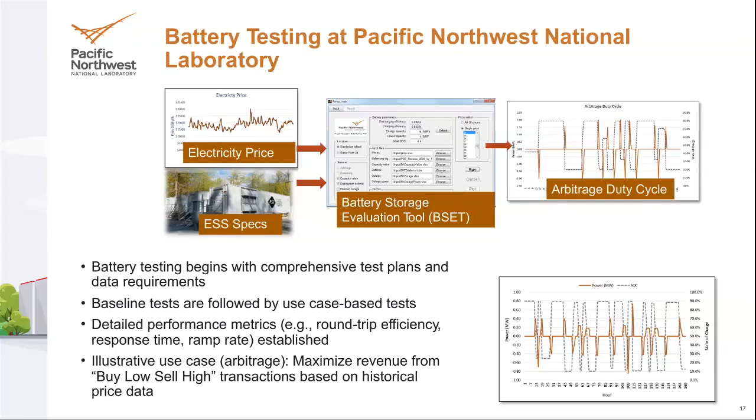We develop these use case-based tests that we think are quite realistic, because many typical testing protocols and duty cycles are designed more to extract meaningful test results - to test the battery system - as opposed to being designed to achieve economic performance. With a use case based duty cycle, sometimes there will be long lags between charging and discharging where you experience parasitic losses due to auxiliary systems, or operation during times when temperatures are dropping or very high, which can have a significant effect. They're not in a laboratory; they're out in the field, so that creates a degree of realism.

You can see battery round-trip efficiency for 4 of the systems we tested as part of our Clean Energy Fund work. The round-trip efficiencies change quite significantly between low, moderate, and high discharge rates, and are quite variable between lithium-ion battery systems and flow battery systems. You may hear that a lithium-ion system can achieve 90 to 92% round-trip efficiency, but when you place it out in the field and add auxiliary losses, economic operation, and temperature fluctuations, it can drop into the high 70s to low 80s. For the flow battery system we're evaluating, it could dip into the 50s in terms of round-trip efficiency - quite low.

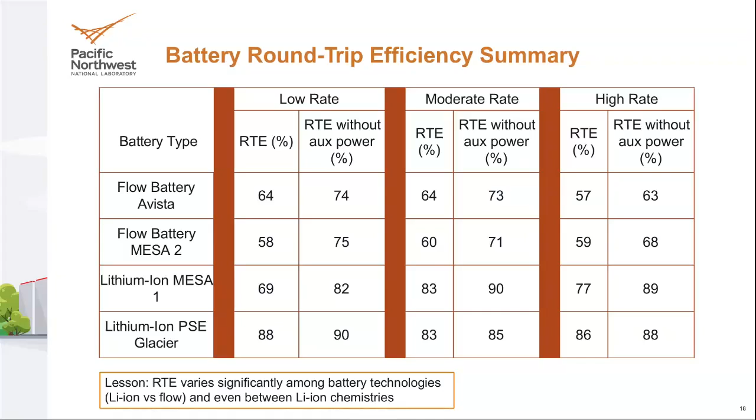If you're assuming you're obtaining a 90% round-trip efficiency and bidding it into a regional ancillary service market, but you're only achieving, say, 75%, you can actually be losing money in the process. Advanced understanding of battery performance really does generate a great degree of value, and to the extent you don't build that into your optimization and estimation process, you may be overestimating your benefits fairly significantly.

We see the adjusted round-trip efficiency for a specific battery system here - this is the Puget Sound Energy Glacier lithium-ion battery system, which was the best performing battery system that we tested. Most of the use cases we evaluated - each box represents a week of testing - for most of them, efficiency is between 80 and 90%. But some dove quite low, depending on how long the rest was and the temperatures, which you can see on the x-axis.

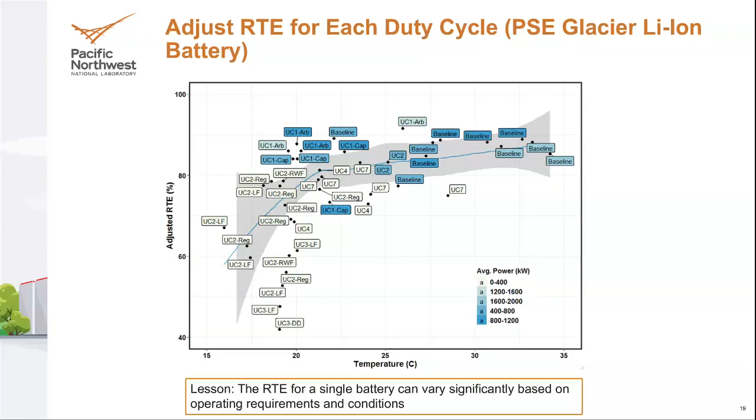If we extended this into higher temperatures - this battery system was on the Canadian border, so temperatures never rose very high, really never beyond 80 degrees Fahrenheit, as I recall. But with a lithium-ion system, if temperatures did rise, it would start to fall again. So this graph is somewhat misleading - beyond a certain temperature, getting into the 90s and 100, efficiency would actually start falling again.

And if you could accurately model these parameters, you could correctly predict the performance of the battery system. So we built this filter through which the data would pass. We had 80 to 120 data tags passing in as granular as a second-by-second basis. We're constantly updating our predictive capabilities through this testing process, and found that within a few short weeks we could quite accurately predict the performance of the battery system as it's used for a broad range of different use cases and in different conditions.

The 5th parameter of note is state of health, which is modeled exogenously from this, because we have to measure it over a long period of time. So we've developed this process of evaluating the cells in the lab, taking a bottoms-up and also a top-down approach. We've had to build that into our models as well, because you cannot exceed certain cycling limitations, and you don't want to continue trading in the market if you're generating a very small value but eliminating 3 or 4 years of much larger economic profits in the out years. So you have to build in effectively a penalty into your calculation for degradation to capture the full cost of the system.

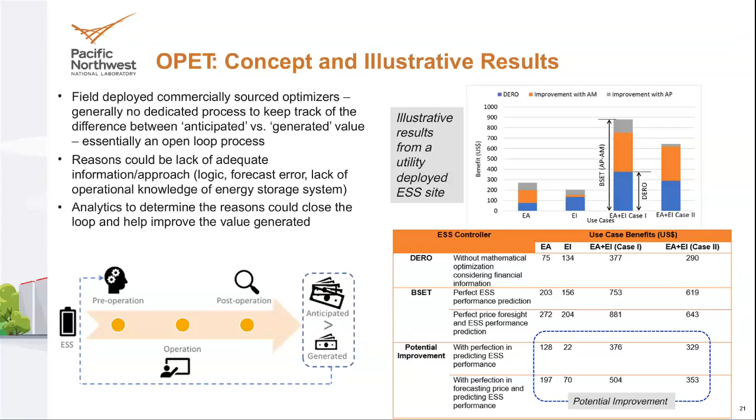Improving forecast error is quite tricky, but we found systems that were set to resolve imbalances to avoid 10% penalties where there were round-trip efficiency losses of 20 to 30%. So every time they were using the battery system to resolve that energy imbalance, they were actually losing money. Understanding the economics of these various use cases and the capabilities of the battery system is key to capturing those values in real time.

So what we've learned is that siting and sizing of the energy storage system is exceptionally important. The value will change from one location to the next and across various energy-to-power ratios and scales. It's important to complete these design studies before you actually purchase and deploy the system. It's important to measure a broad set of use cases, but typically it will boil down to, say, 3 to 5 use cases that you can actually capture in real time.

With that noted, if you have an estimate that excludes distribution-level or transmission-level benefits, you may be missing a very large benefit. And finally, from one region to the next, the benefits differ quite significantly. Then within the Pacific Northwest, particularly, but across the United States, the utility structure will dictate value. So for PUDs and co-ops in the Pacific Northwest, they're for the most part Bonneville Power Administration customers, and they face very different value propositions relative to, say, vertically integrated investor-owned utilities in the Pacific Northwest.

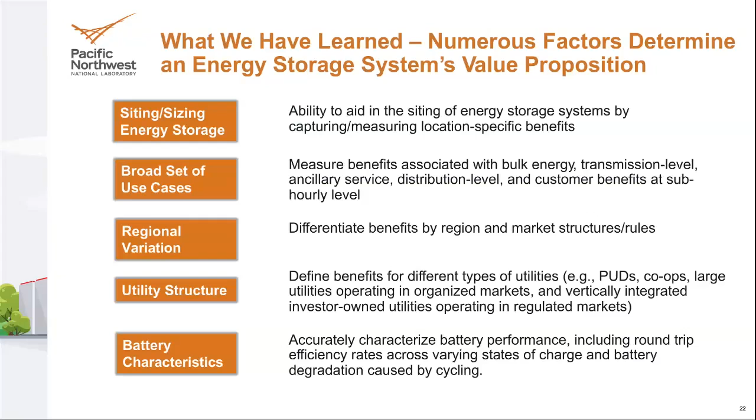And then finally, accurately characterizing performance and then weaving that back into the economic optimization is really key to successfully estimating these benefits in a realistic manner, and then capturing those benefits in real time.

Finally, I want to acknowledge the leadership and support provided by Dr. Imre Gyuk at DOE and Bob Kirchmeier at the Washington Department of Commerce.